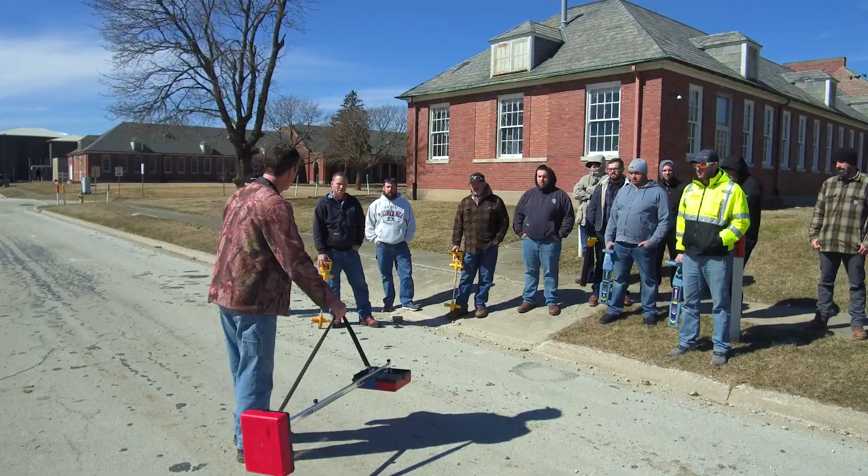So it's always been a hands-on experience that we've been told is our strong suit. That's what students like. We go out in the field for a big percentage of our class. We work with all kinds of instruments on all kinds of locates. And according to our students, that's what helps them learn the best. We do inside stuff, but they say it's the hands-on where they learn.

So now we've got this big challenge with COVID. We need to develop products where we know the people aren't going to have the hands-on instruction. So how big of a task do you think that is, Paul? I don't think it's a huge task. I think that we've always strived for that simplicity, command of the instrument, proper use of it, understanding of it's going to promote troubleshooting skills, and that's it.

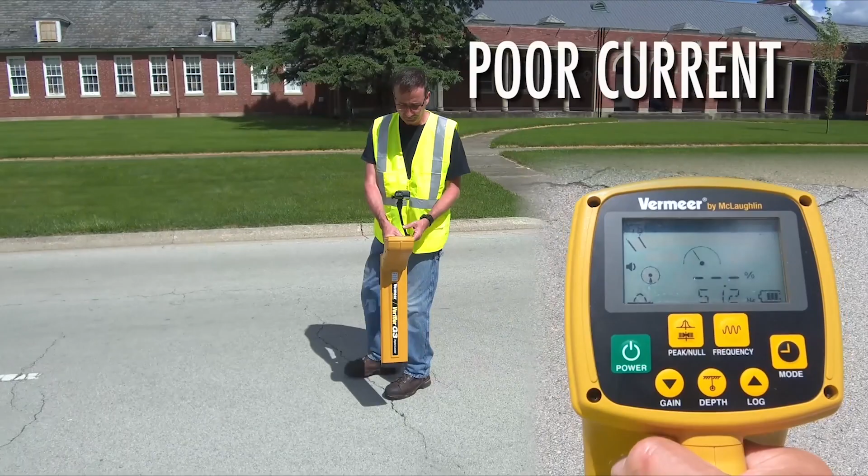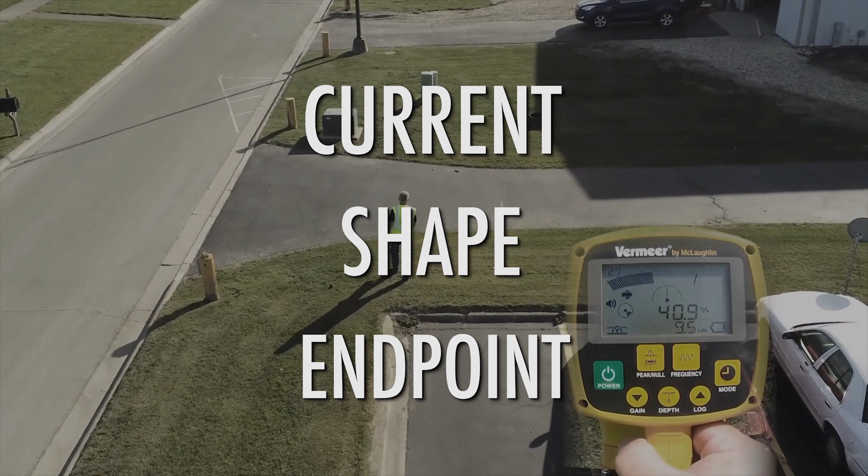Don't overthink it. You know, you want to be able to assess the current, you want to be able to assess what you're locating, you want to be able to assess the shape that basically deals with our accuracy. And if you don't have those three things, you do not have a good locate.

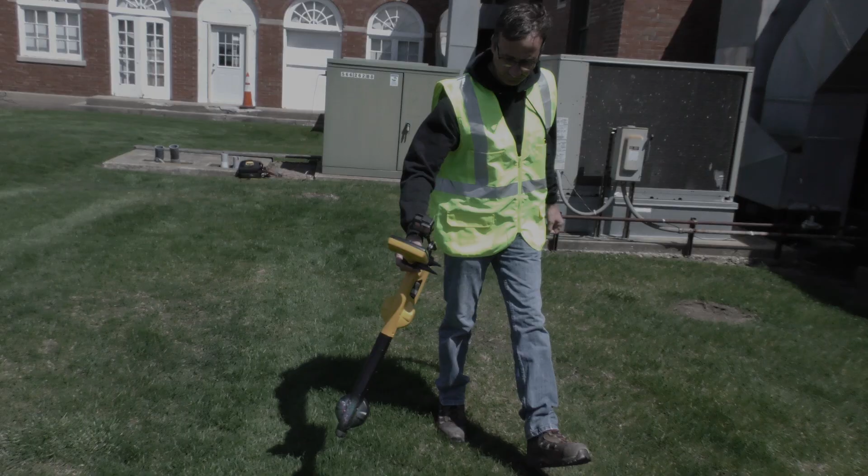I think of the ways that I was trained and what I wish people would have shown me. A lot of it was just information that was passed on from person to person and nothing that was ever proven or set in stone. And I think that's what we were able to establish here, is that, look, this is the way it actually is, and we can show you.

So the people find it very interesting just in how the equipment works and the antenna configurations and being able to see inside of these. And the ability to determine, hey, this is what the receiver is actually trying to tell you. Now maybe I can go to my transmitter and adjust for it.

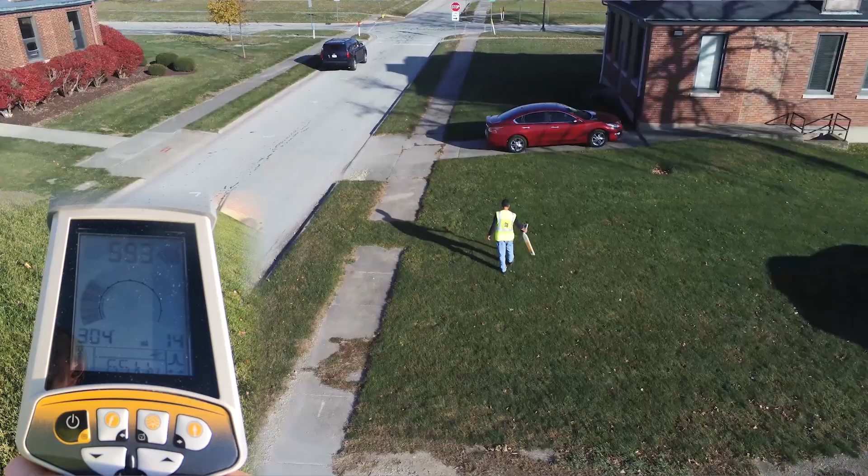You know, imagine having to do an online course first and watch people locating at Staking University, passing your test for the video training, and then coming to Staking University and doing the same locate, but this time it's real. And your eyes and your interpretation of the instrument and how you apply the transmitter is all going to merge together at once.

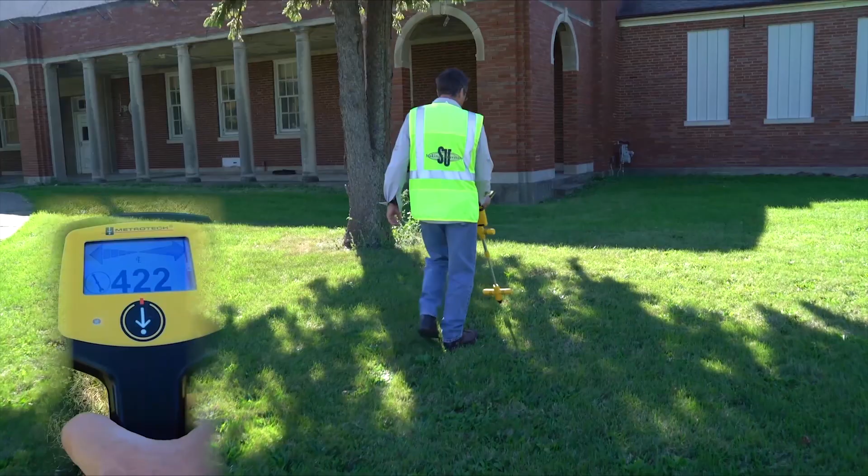And clearly what we've tried to do is to give you that experience through a two-dimensional screen. But hey, if you can have that plus live instruction at the same locate that you saw, oh, you know, that's pretty cool. And I don't know entirely what to expect for that, but I can't think that it'd be anything but really, really good for the student.

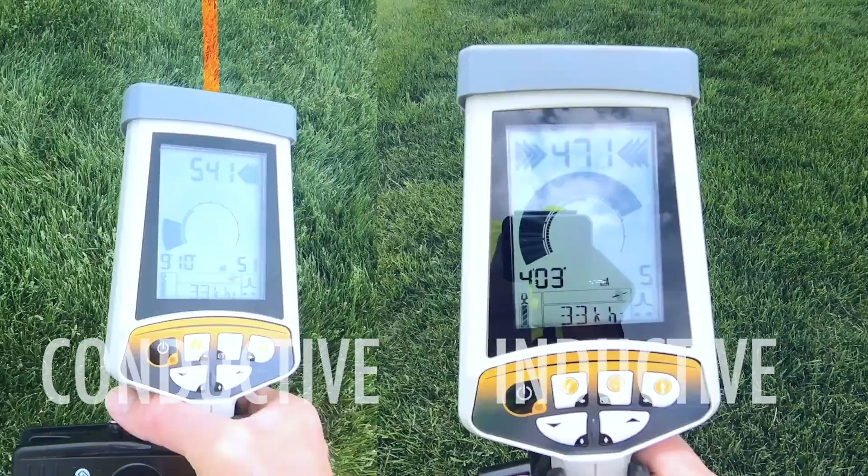So I'm the new guy here at Planet Underground. I've been working here for a little bit over a year, started in January of 2020. And much like these guys, you know, when you first start, you have no knowledge of the whole industry. And one of the main things that they wanted me to do was to edit all of their roundtable footage that they did just a few months prior.

The equipment seems to be so much more robust as far as features and benefits and what it can do without having to touch a button now, that having that base level best practices is even more important now, that the equipment can be more confusing to an operator that may not be seasoned. Correct, without a doubt. Would there be a way to work that into some type of curriculum? I would call it continuing education.

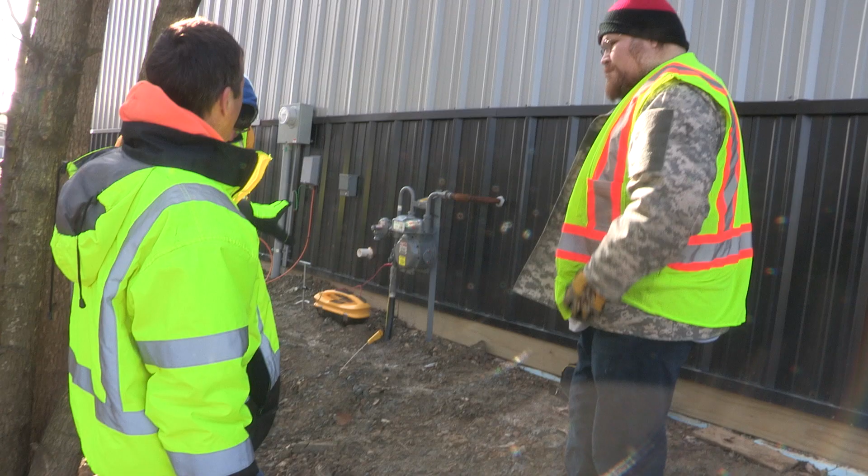One of the things people were talking about at the round table, and I heard numerous times, were people talking about the lack of training. I mean, there is no official training for locating. Anybody, if they wanted to, tomorrow could wake up, buy a locator, and start their own service if they wanted to. No training required or anything like that. So, when you think of it that way, it's kind of scary just to know that somebody out there putting marks on the line could really have no idea what they're doing.

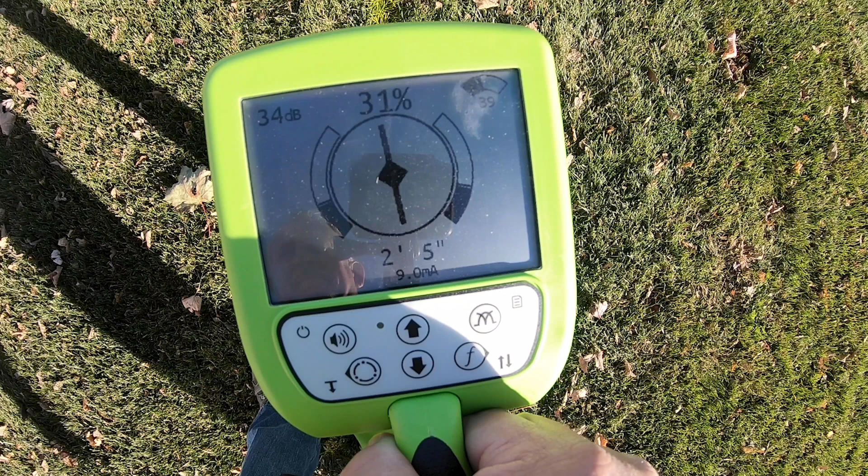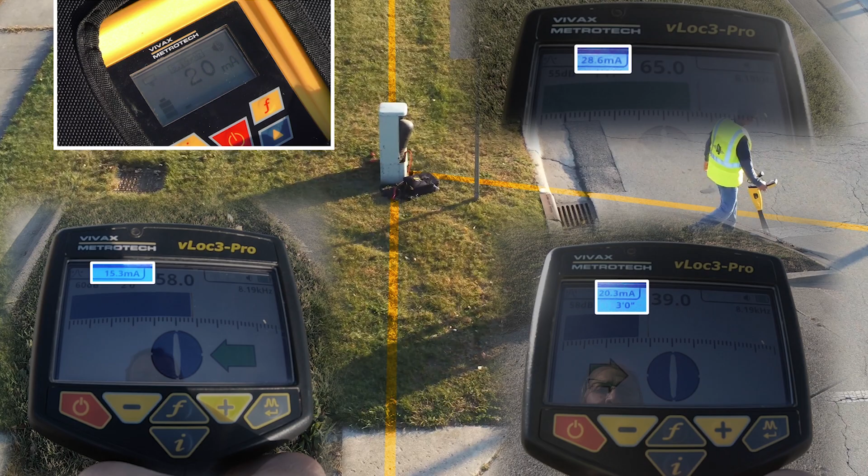With this project, I think that takes this whole entire training the locators to a whole different level. It's taking all of the knowledge, obviously, that these teachers here at Staking University know, and taking all of our skills at Planet Underground and putting them together. I guess it's kind of interesting because there hasn't actually been a project like this for a business that is so important, like utilities and utility knowledge.

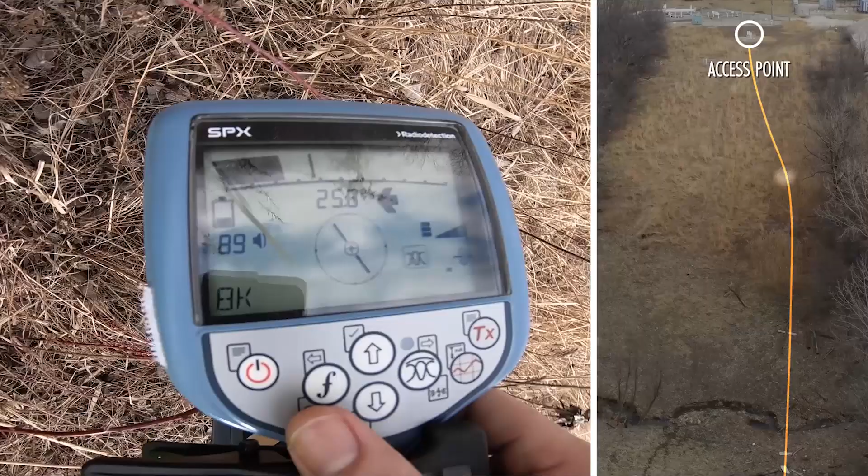And I gotta believe that just about every business, every company, every person now in 2021 is using video for everything, for learning, for teaching, really just for their product. So it's really just about time that video is now another avenue for people to learn about utilities. What's so good about video is that it can reach out to so many people who aren't with us now, people who are not in our country, people who don't speak our language, and video is really a language on its own.

What's also really great about this is that for the person who has never learned about locating utilities, they will be able to understand it a lot quicker, and more people in general, because we want this to be worldwide. We want more people to understand it, and we want people to understand things faster.

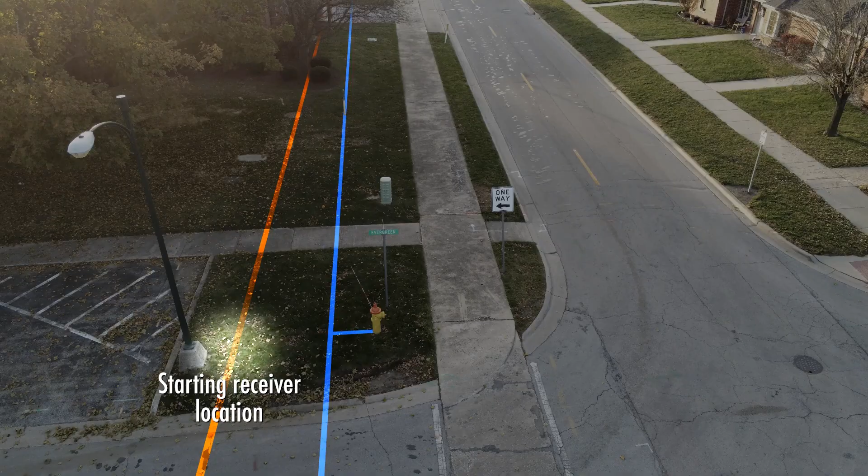But not only that, the people who have been in the industry for so long, there are some things that we want them to actually unlearn because of the way things have been taught in the past. And video is another way to have that happen as well. So it's just kind of amazing that there hasn't been a product like this to really bring a learning management experience like this to people. And we're hoping to do that with this learning management system.

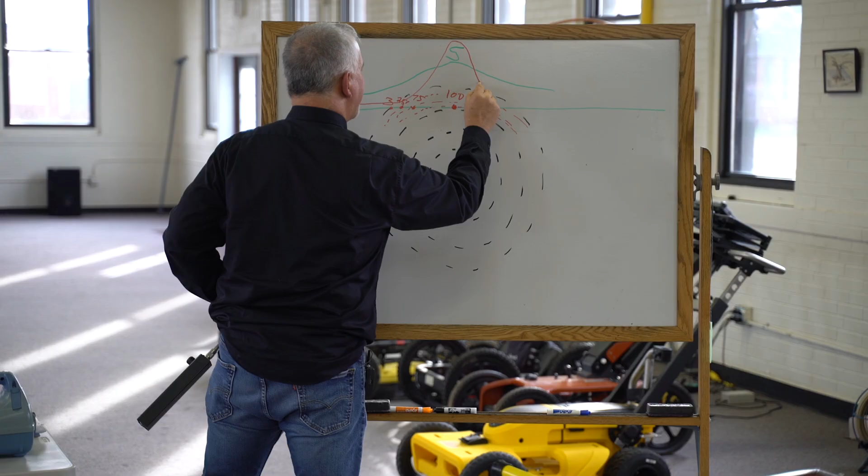That's where this video training kind of gets a little better than the hands-on training in some aspect, because while you can sit in a classroom and explain how signal comes out and how it works and the science of it, we can actually show graphics and other information that's happening during the locate through video, and it really just gives you a full in-depth understanding of how a locator works.

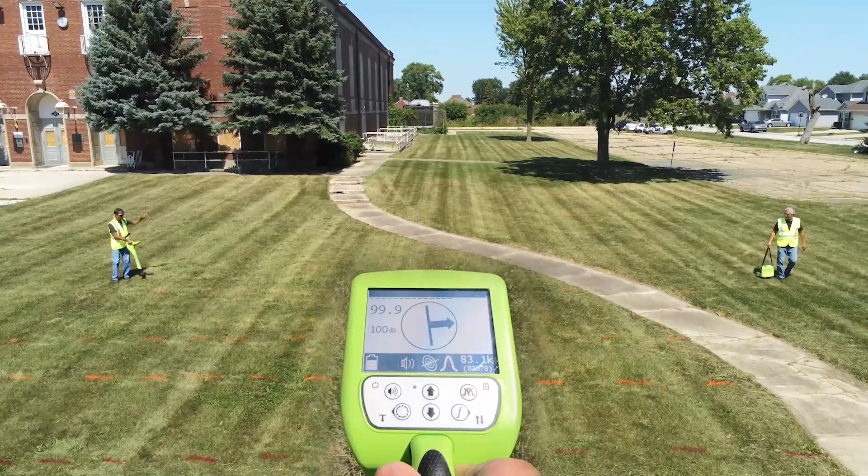So a lot of this project focuses on locating training, and it's how to use multiple different locators, how to locate lines, how to ground, how to hook up properly, different frequencies, everything. But there's also other parts of the training material.

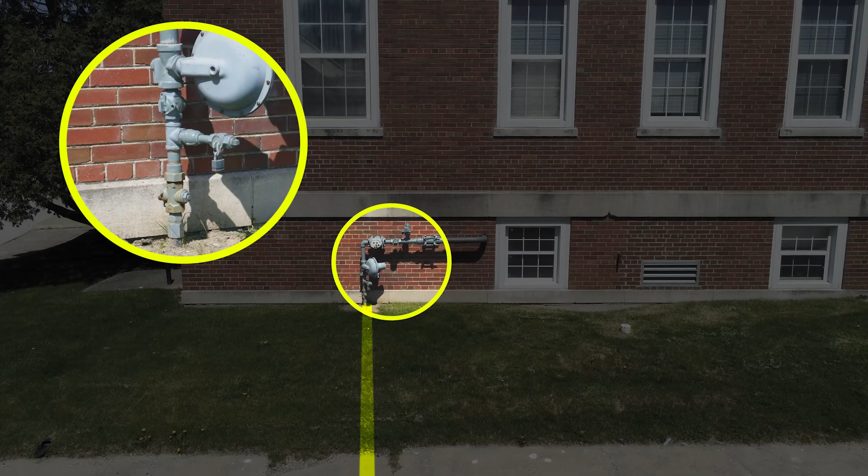So I guess what helps with me and the rest of us that work at Planet Underground, where we're more media focused, we didn't know all about utilities going into this. So in a way, we actually got like the first-hand look at what the training program is going to be.

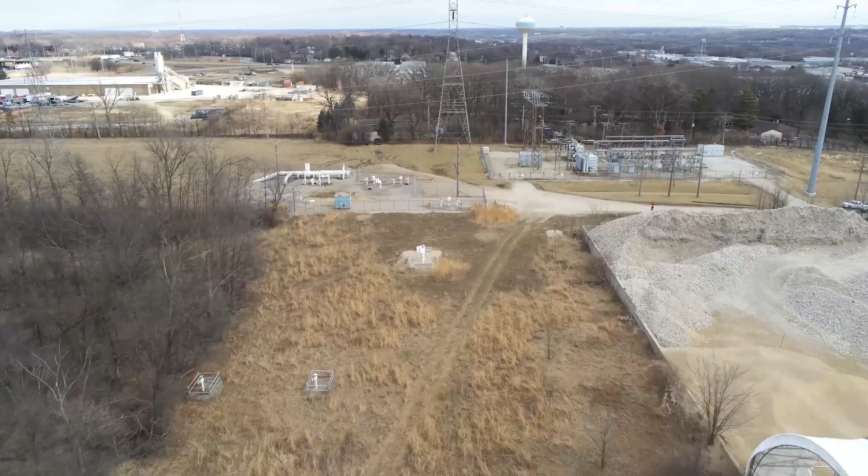And for me, it was really eye-opening to learn how an electric utility, for example, goes from a power plant, where utilities come from A to Z, to our homes, how that works for telephone, gas, water. And like I said, it can teach not only locators, but people like me who know nothing about utility infrastructure. And it's something that's never been available through a video training platform.

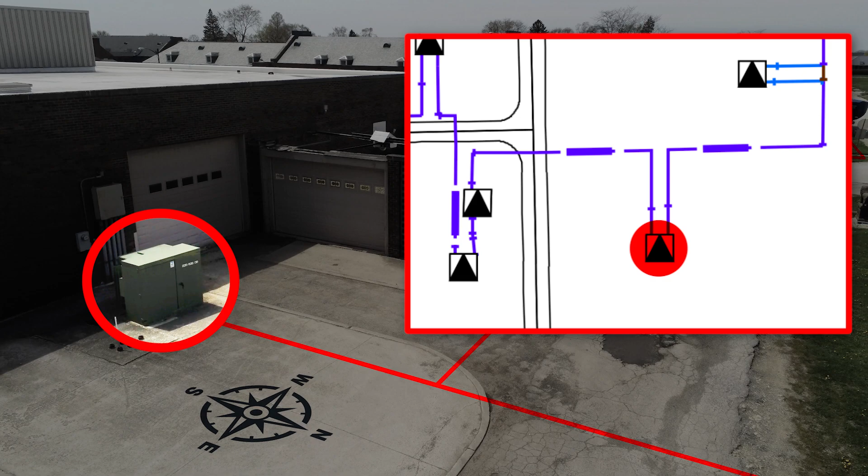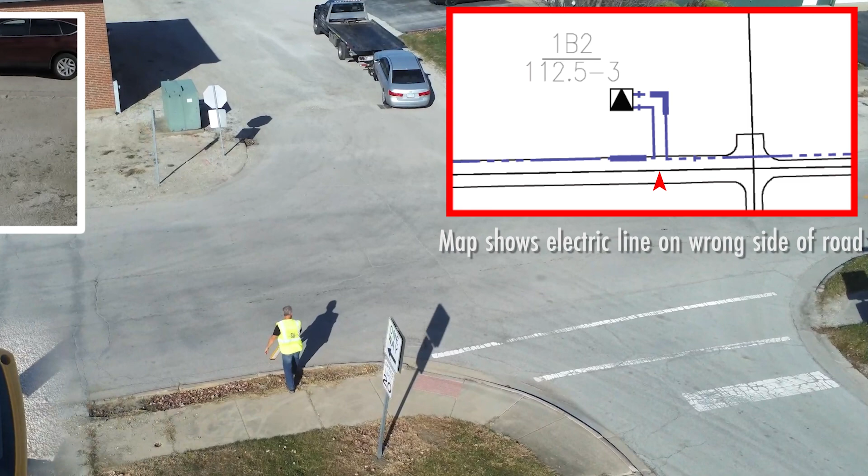That's why we have other parts to this training program besides the locator instrument training. Map reading, for instance, is a really interesting part of the program, I think. We have examples of maps where people have put electric lines on the wrong side of the road. Or people have confused one utility for another one.

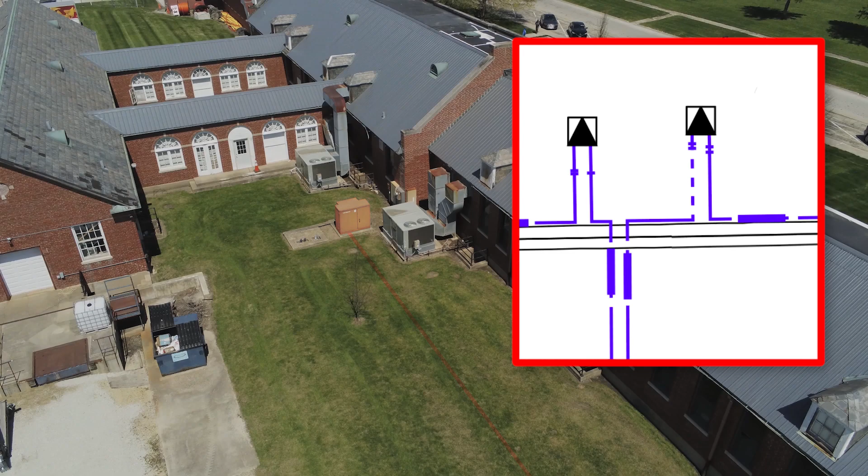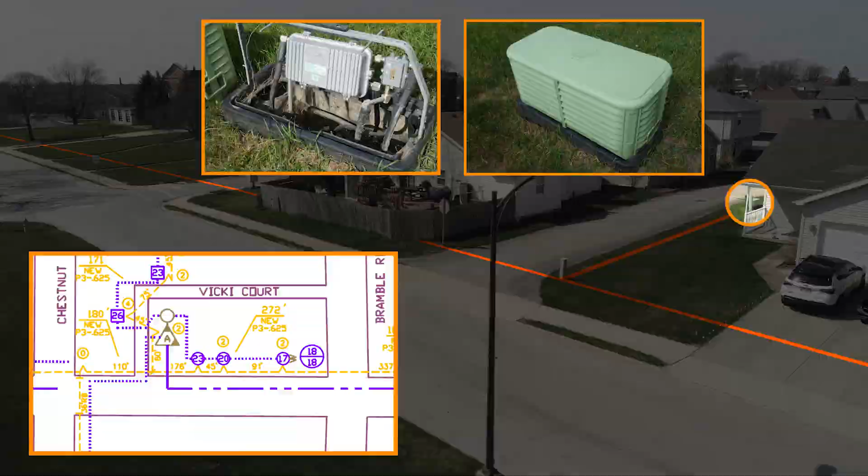A three-phase electric cable could be depicted as 3 different lines on a map, or maybe just by drawing a symbol over it. There's no specific standard as to how to write your maps, nor is there any legend to show you what these symbols mean. So reading maps isn't just the end-all be-all to find the utility that you need. It's a very helpful tool to help you verify or get a clue about where what you're looking for is. If something looks confusing on a map, you still have to go out there and find it yourself.

There is a tickets and maps portion. It's a testing portion where you can test an employee on how well they can read a ticket and look at a map. This isn't so much an instructional lesson as it is a testing portion. We start by giving you a ticket. This ticket has an address and an extent, just like any other one-call ticket would.

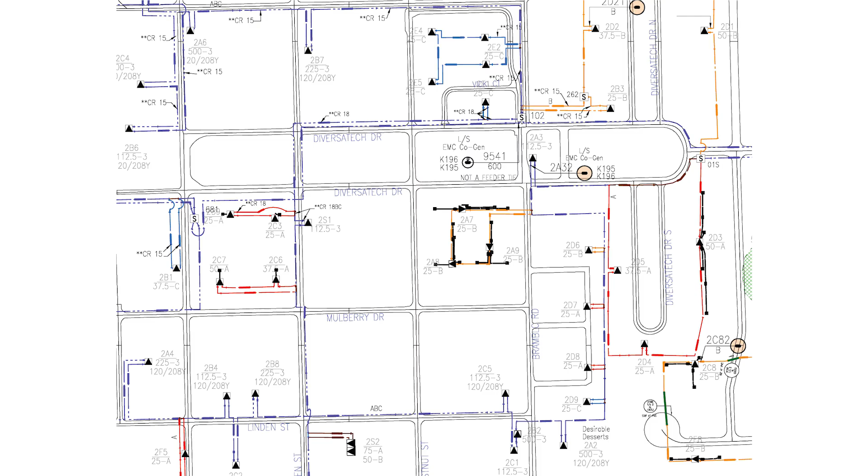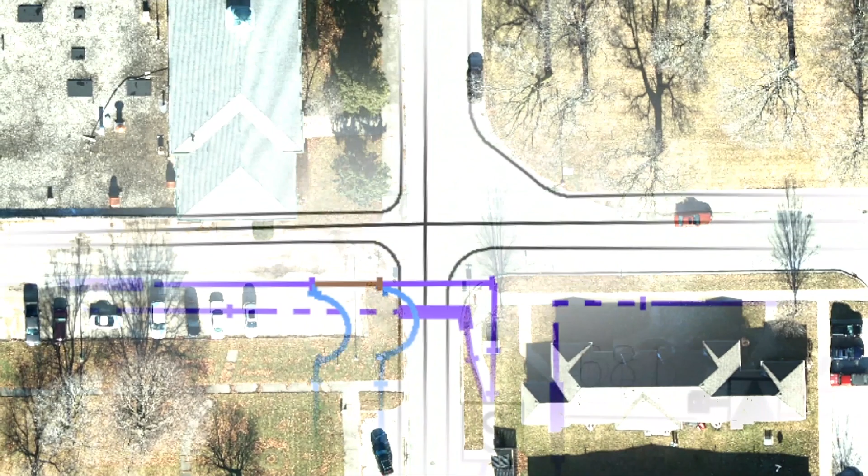Then we give you the utility maps along with a Google image and an aerial image of the neighborhood to reference. In that aerial image, there'll be 14 intersections labeled, and once you click on one, we'll show you a short video of what the intersection looks like. The viewer has to answer some questions about what lies in that intersection.

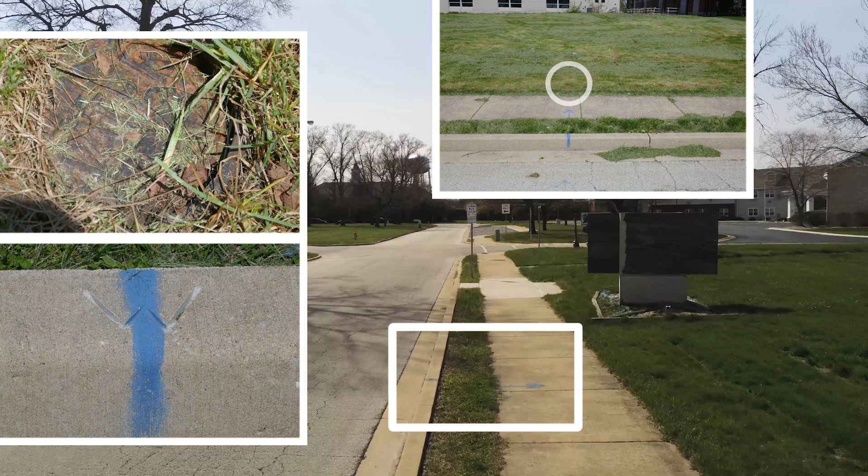And then there's a visual observation portion that kind of goes with the tickets and maps. We go down the road just like you'd be walking down, and we highlight all the visual indicators for utilities on that street. The video has narration that talks about what utility the indicator represents, and for people new to the industry, it can teach them what to look out for in the field.

Showing all the visual indicators and clues out in the field can really teach and prepare any excavator for when they're out there working. And it can help them avoid hitting unmarked utilities.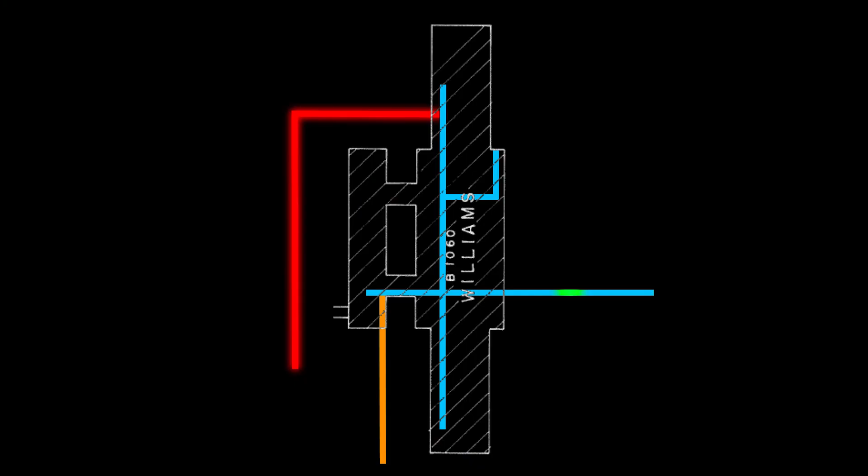As we said before, this knowledge does reach out universally, and we are confident that this project will get out to the world, not just the United States, because there's nothing like that that exists right now. And who better to make the product than Staking University and Planet Underground?

If the receiver is swung too high either side, the peak antenna and the null antenna can reverse. That's not how to say it. Let me do it again here.

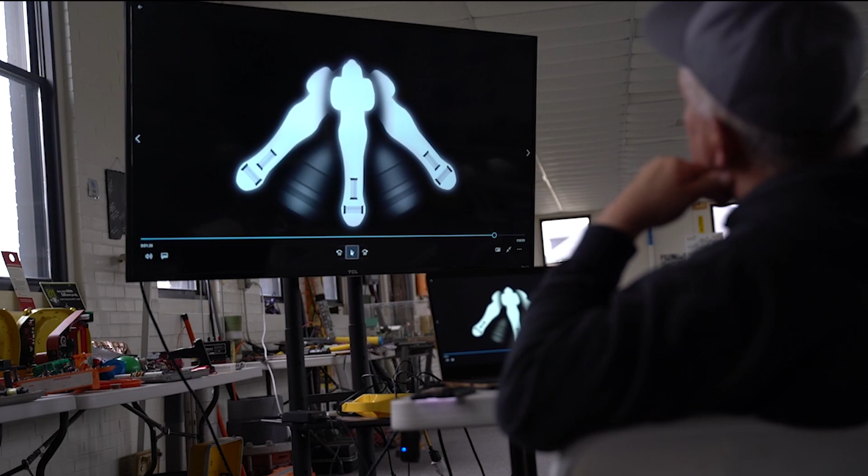One of the things that I'm trying to do with piecing together the order of these videos is to deliver the right thing at the right time without the benefit of knowing who the viewer is. So why don't we take a look at a video? It has to do with something you brought up earlier about antenna configurations.

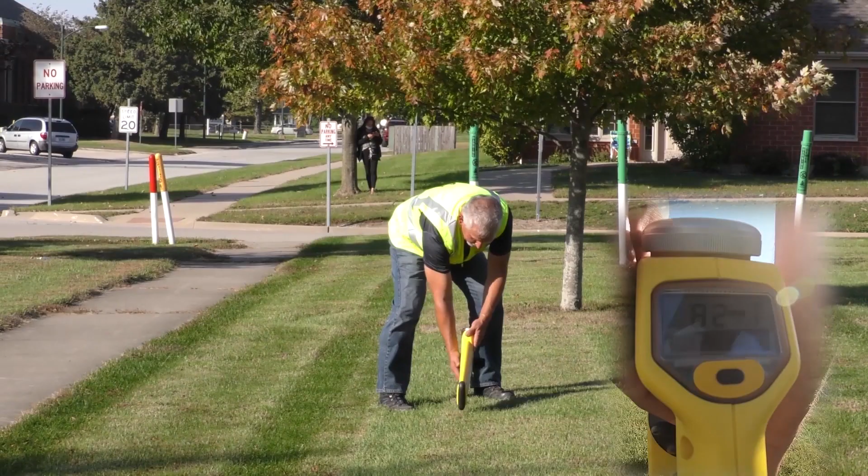And you know, these machines, they all work on the same principle, but we can't tell people that they all do exactly the same thing relative to you looking at the receiver. That would be a stretch. The concept's the same, the physics are the same, everything is the same. However, at times we can clearly see differences. Right. So we'll try to explain those differences to people.

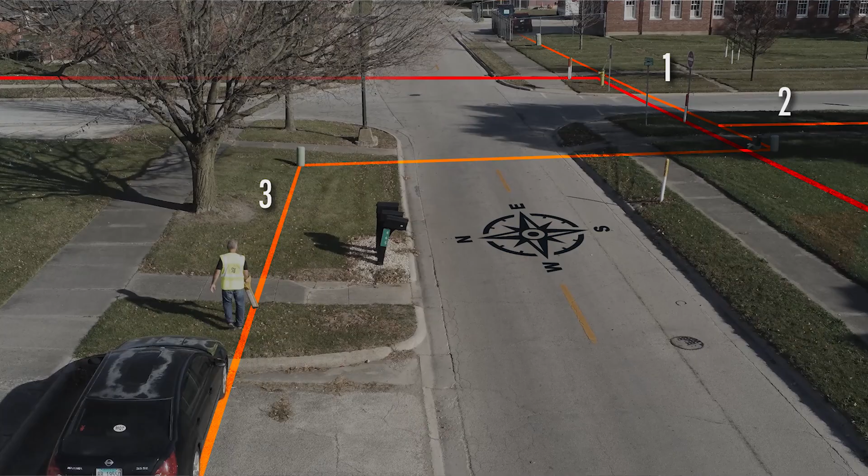Yeah, I don't think the average locator is going to be exposed to as many of the different scenarios that we get to see. Or as many of the pieces of equipment, the manufacturers. We've kind of worked with them all and continue to get new things, but boy, with every new version of a machine, you go back to thinking, you know what? This is just like the 1970 machine, but now they've given you another way to interpret the same received information.

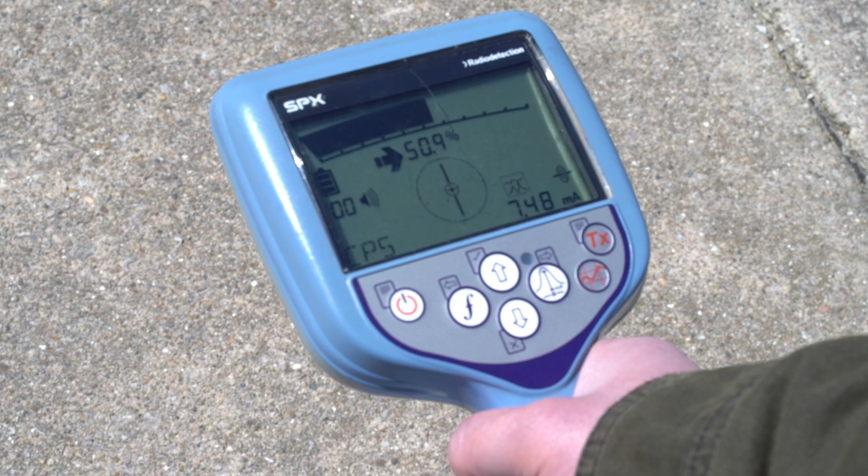The electronic manipulation, not in a bad sense of the term, but yeah, they can make it look like whatever they want. Yes, yeah. Well, let's go over here and watch the video, and we'll come back for a wrap-up talking about what we're trying to achieve with getting the viewer to learn more.

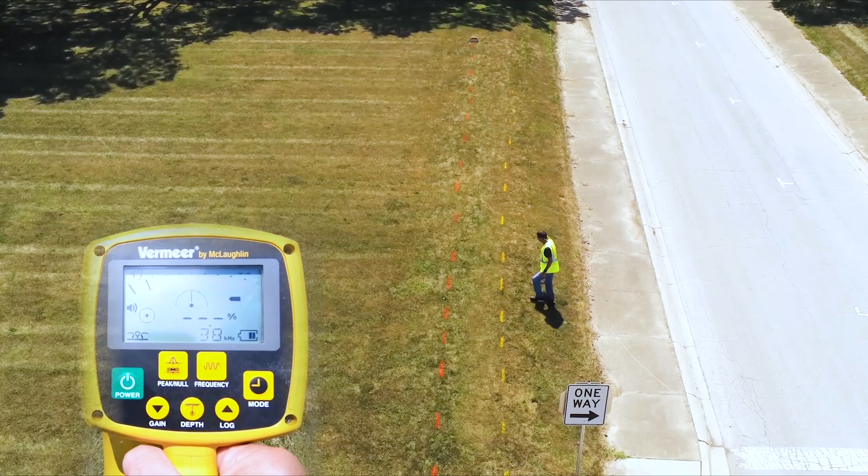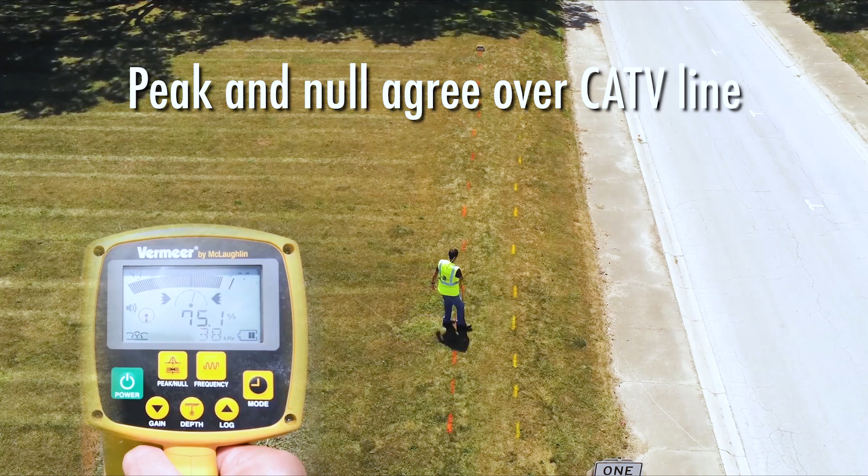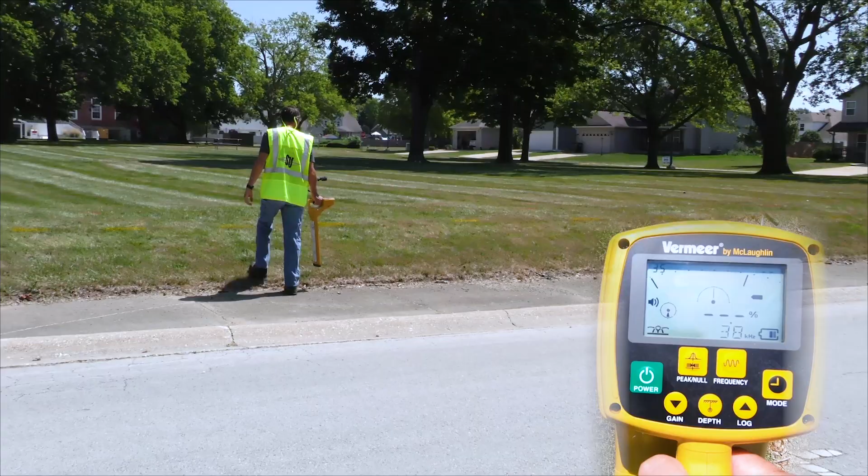Here, we have the transmitter set up over a cable TV feeder. Within 4 foot is a 2-inch steel gas main. Yet you'd never see any sign of bleed off when you hold the receiver in the vicinity of the energized cable TV feeder. Now we'll move the transmitter over the steel gas main. Again, we see great signal over the gas line, but nothing over the parallel cable TV feeder.

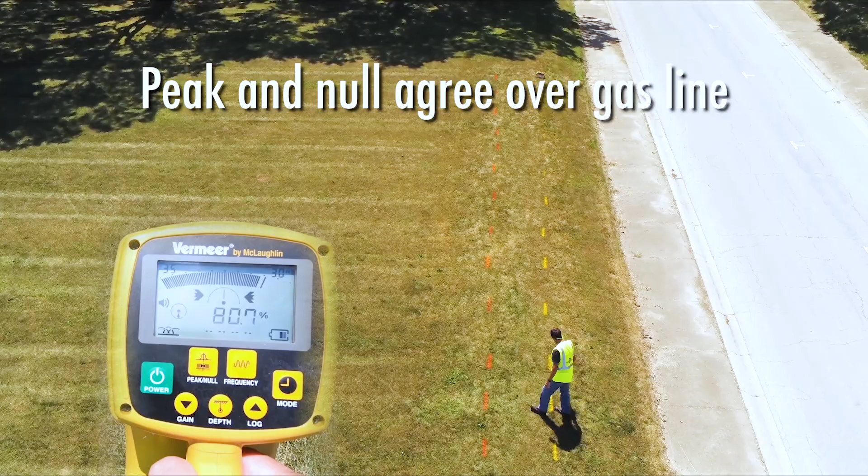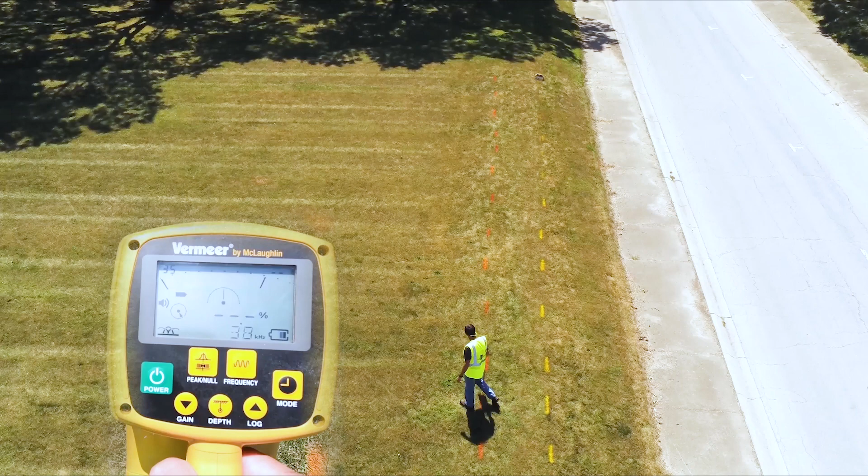Now, every situation can be different from the one that preceded it and the one that followed it. But what we just showed is that induction can really be isolated on a target where you put the box directly atop.

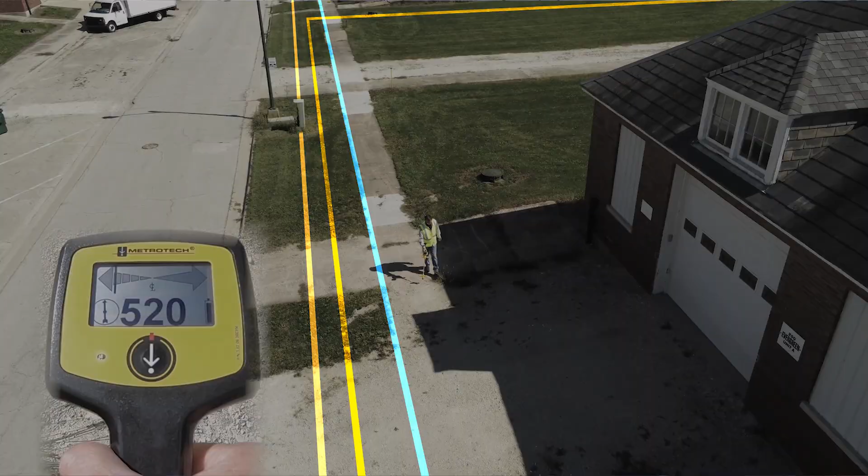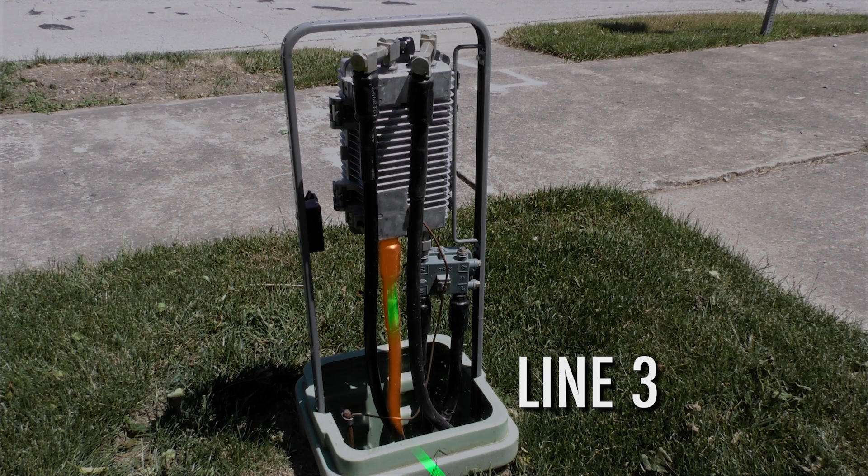Existing locate people don't have a lot of continuing education. On the video products that we made and the live broadcast training that we're about to embark on, we do have a bit of a challenge in that the student we're so used to being right next to us could be anywhere in the world. And we strive to recreate what we do here in a face-to-face class through our training videos. And what makes you think that we can even be successful by doing those two things?

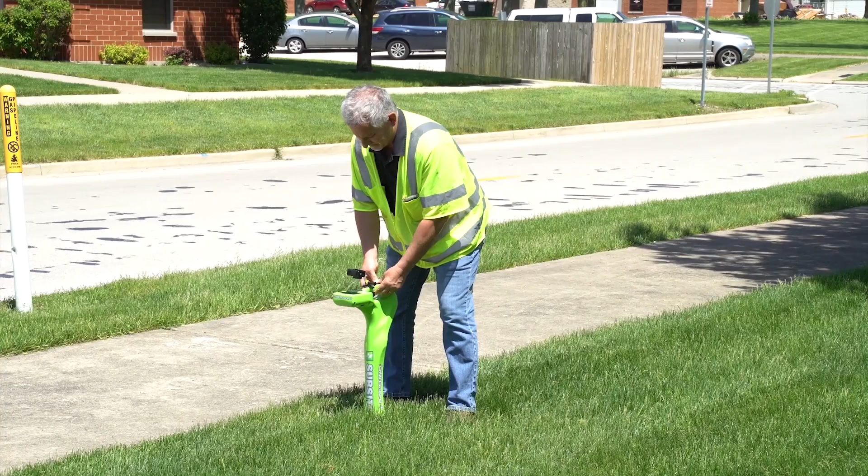Well, you know, like you said, we get to be in front of a lot more people, but when I think back, the way I was trained, the exposure to other techniques and other people and other methods was very limited, and I located for a lot of years thinking that I knew everything about locating. And now I realize that I still don't know everything, but I am learning. And that's what it's all about.

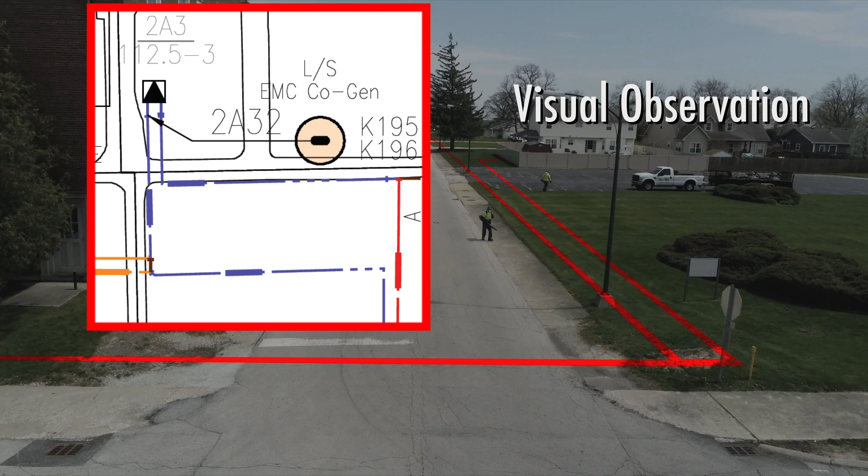It's the key of being able to share information. You know, if we can do it on a bigger scale, not only will we become better, but the students will become better because we'll be able to reach out and touch more people. Yeah, probably one of the biggest things people come into class with is the notion that there's kind of one way to locate. And oftentimes we're able to unlock something in their brain that allows them to realize that you can't do the same thing on 100% of your locates.

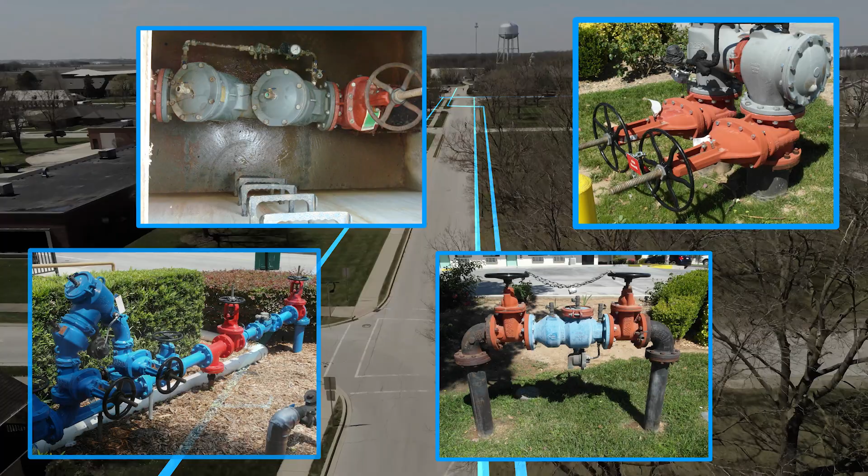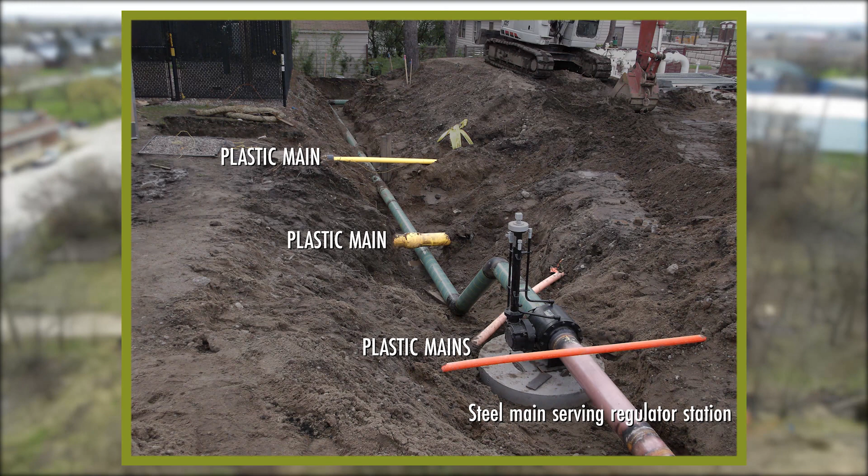If you stay in the same area, let's say as a contract locator, and I'm just picking a town, Houston, you may have changed companies over time, but you're still working with the same pool of locators. Your exposure to new things is somewhat limited by the collective experience of all these people locating the same utilities in the same city. And I think one of the greatest things that happens oftentimes in classes is when somebody says, you know, I was always taught this way and I never had a reason to not believe it.

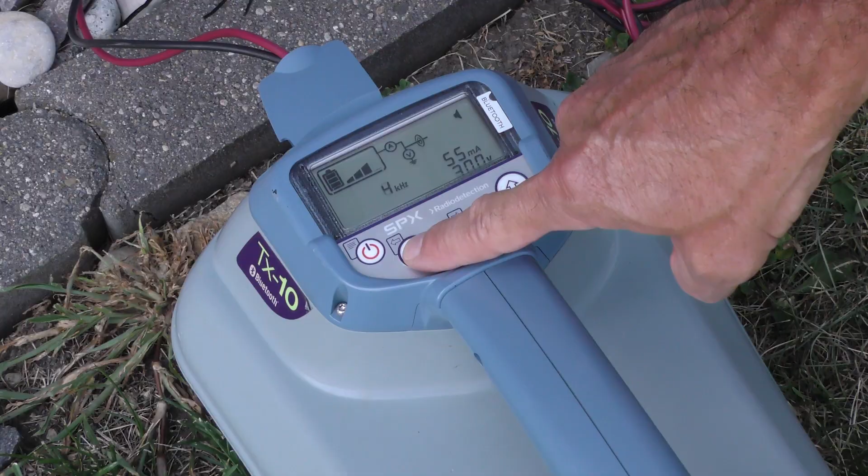And a lot of the things that I saw in the field would confirm this. And so I had this bias that this is exactly the way to do things all the time. You've shown me another way to do something, and I'm appreciative of that. And that's, of course, where we receive our highest compliment, when somebody says, I've learned something and I didn't think I would.

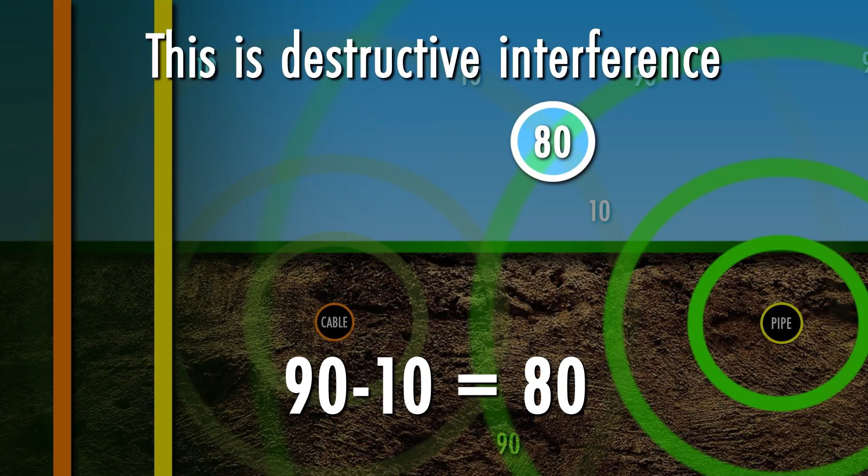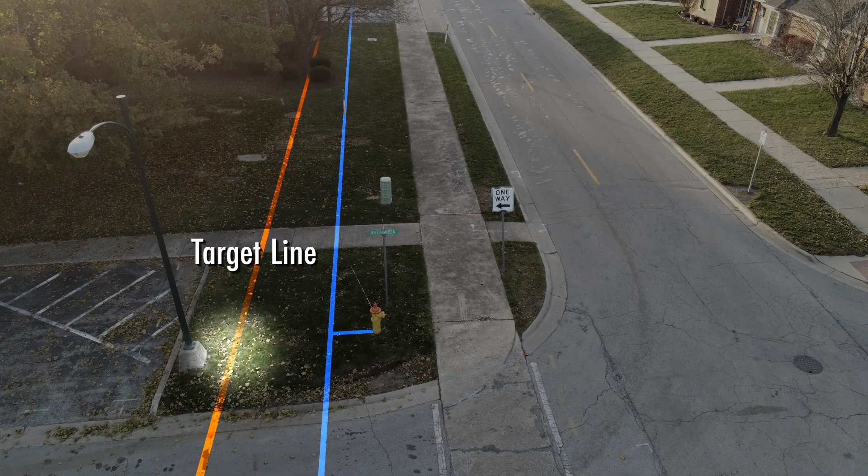Right, taking the divider from private locating scenarios to the one call type or locate scenario, in reality there shouldn't be and is no real difference in the end result, and that is, hey, do I have a signal? Am I on the right target? Am I accurate? No matter which side you're on, the end result is what I feel is important. But there is a lack of exposure if you're on one segment versus the other. You don't know the difference because you've never been exposed to it, so you do not understand what you do not know.

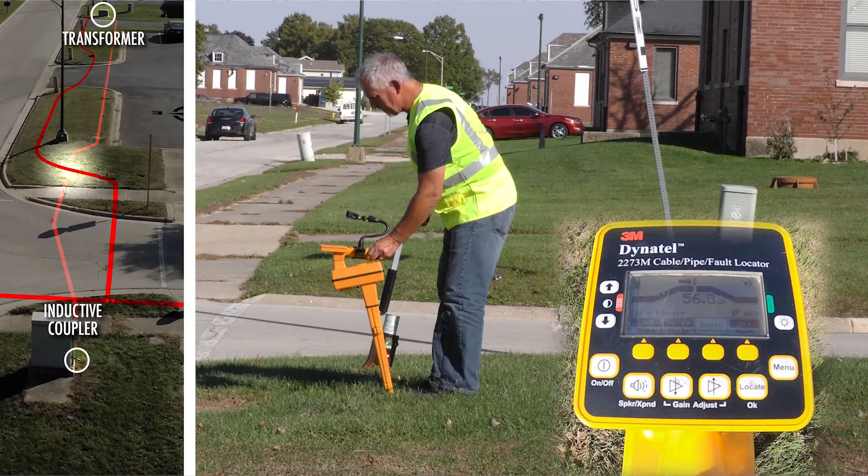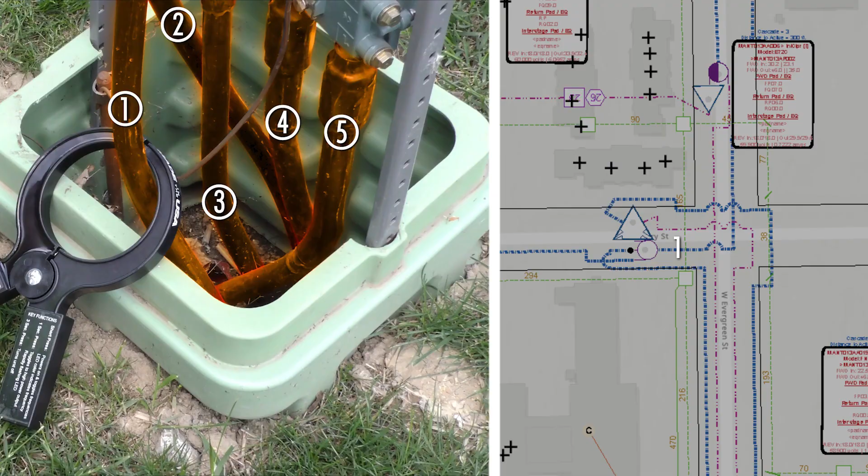Again, learning it in a class is one thing, but until we get to, like Black Mirror, where you can record all your memories, you just don't retain all that. And this is arguably the most important industry to actually do that. It's one thing in math class, if you forget something and do bad on a test, but if you do bad on a test in this industry, that could be life-threatening. So to have video, to be able to go back and watch it, to really use it to retain that information, I think is what will hopefully make this really successful.

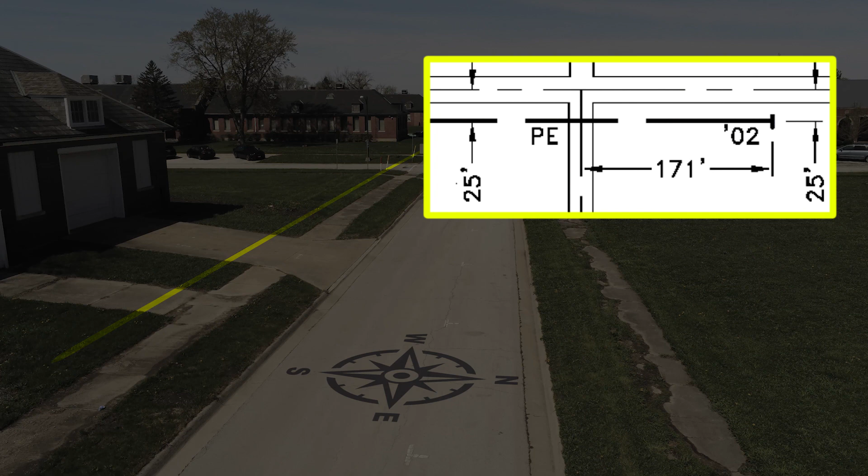This is something that even after you're gone, it can live on forever, or at least until the next big thing. Continue to build. Well, right. And so this is hopefully turning the page, or really, it's 2020, it's time to bring the utility industry into 2020 as well. So hopefully we're sort of the pioneers in that, and I think maybe we are.

Well, we're recording this a week before Christmas in 2020, and whatever happens, we don't know right now. Yeah. So we think we'll still be alive to finish this video project. Yeah, we're hopeful. You guys have a better chance of that than I do. But no, they're watching this because it was successful, so we did it. Yeah, if this ever airs, it worked. Awesome. Or after the apocalypse, someone finds this, and it's like, sounds really dumb. Well, it's a good thing we watched Dark, Kevin, because we have an understanding of time travel. Guess who just finished it the other night? Oh, did you really?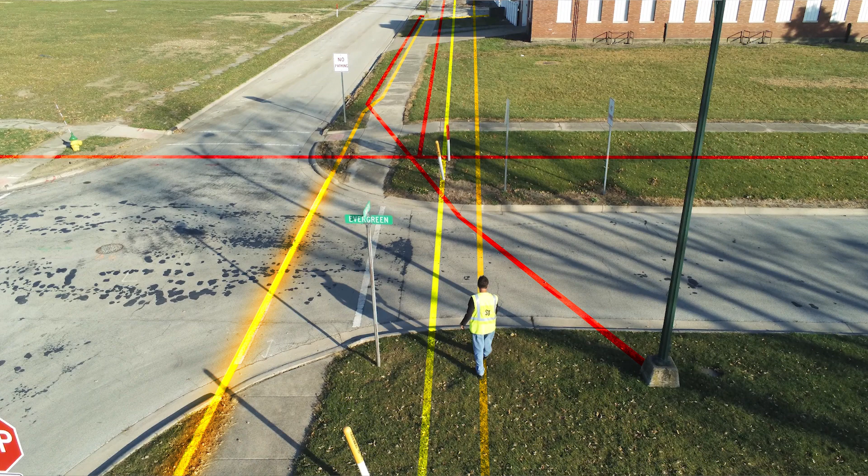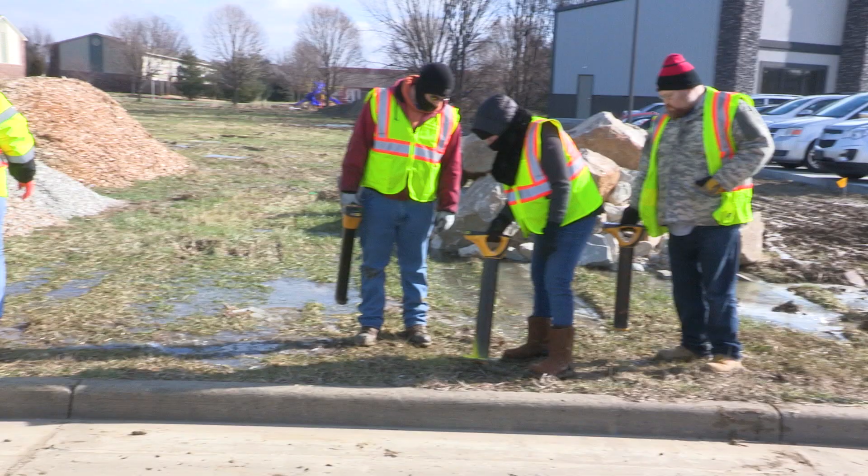That's one of the challenges that I'm having in making the training material. I'm not going to be there, you're not going to be there to read the person, which is so important in a face-to-face environment. So we can't necessarily start everybody with the same series of videos and retain engagement when we're not there like we can when we're with people. It's a huge advantage to be able to see, look, this is the type of equipment I have and this is the information it's relaying to me. Even being able to go to an on-site, to them in their arena, and look at the things they have to deal with on a daily basis and use their equipment to the best of its ability, then they're going to be able to make more logical decisions for sure.

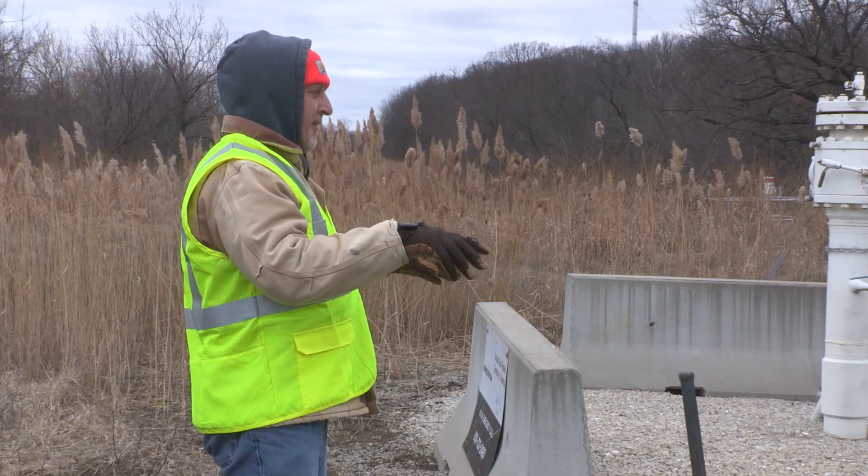Yeah, and to kind of wrap this conversation up, it's been 10 years since our last video training, and we're not going to be here, you and I, 10 years from now. So we're going to have to use the tools that we're creating right now to help bring the next generation along, to have the understanding that we have today and build on that for the next time there's a major revision to this material. Who knows what's going to happen in the world of animation and cameras and film, but I can safely say we won't be putting on X-ray vision glasses to see where utilities are. So we're probably still going to be using this type of equipment, but imagine what's going to change in 10 years. Right, the foundation was set many years ago, and the legacy continues.